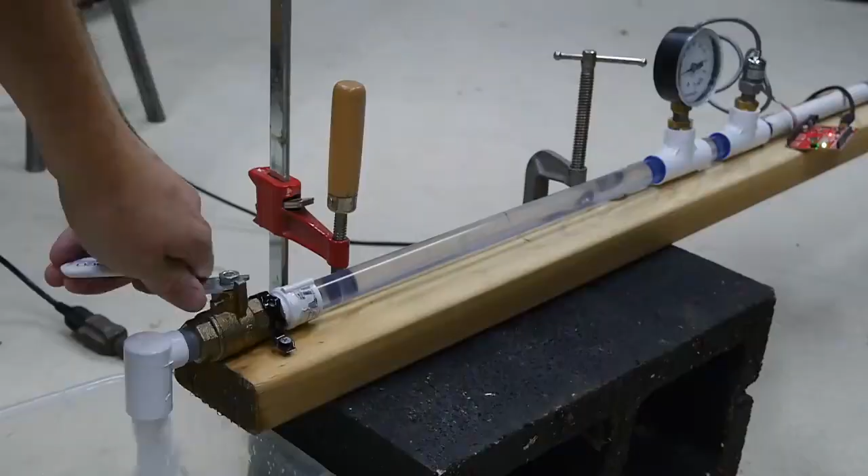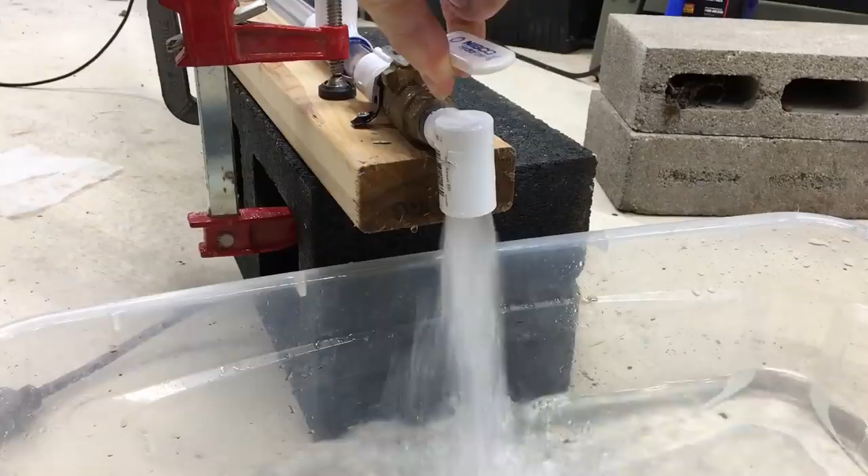It's easy to forget how heavy water is since we hardly ever carry more than a few ounces at a time. But if you add up all the water in the pipelines of your city, or even just the pipes in your house, it makes up quite a bit of mass. And when all that water is moving through a pipe, it has quite a bit of momentum. If you suddenly stop that movement, for example by quickly closing a valve, all that momentum has nowhere to go.

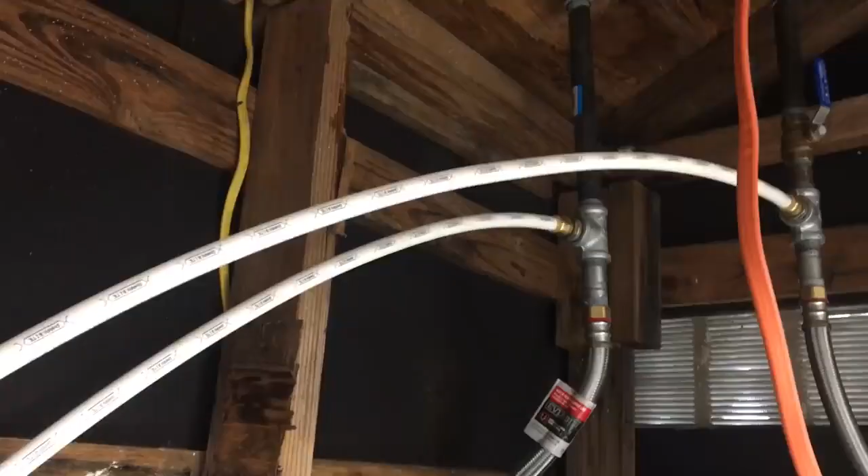Since water isn't compressible or springy, it can't soften the blow. You might as well be slamming concrete into the back of the valve and the walls of your pipe. Instead of being absorbed, that sudden change in momentum creates a spike in pressure that travels as a shockwave through the pipe. Sometimes you'll even hear this shockwave as banging in your walls when you close a faucet or run the washing machine, hence the superhero-esque nickname, water hammer.

Banging pipes inside your walls can sound a bit spooky, but for large diameter pipelines that can be hundreds of kilometers long, that surge in pressure from a change in momentum can cause major damage. Let's do a quick calculation. If you have a pipeline carrying water that is 1 meter in diameter and runs for 100 kilometers, a fairly average sized pipeline, the mass of water in the pipe is about 80 million kilograms. That's a lot of kilograms. In fact, it's the equivalent of about 10 freight trains.

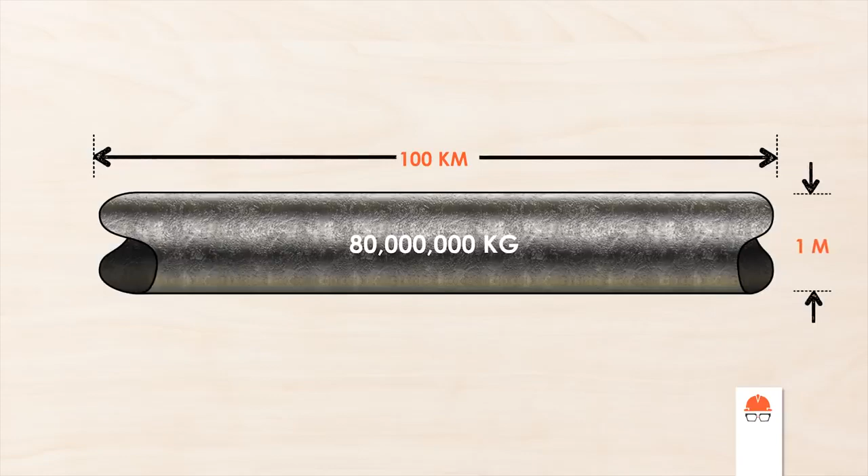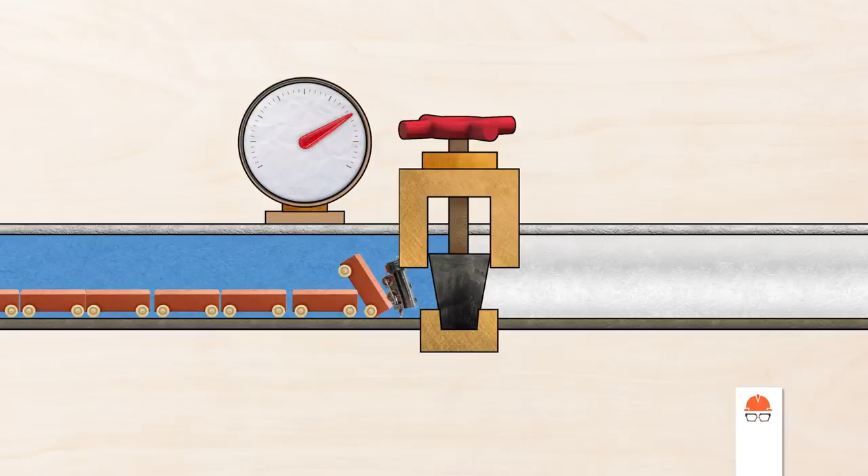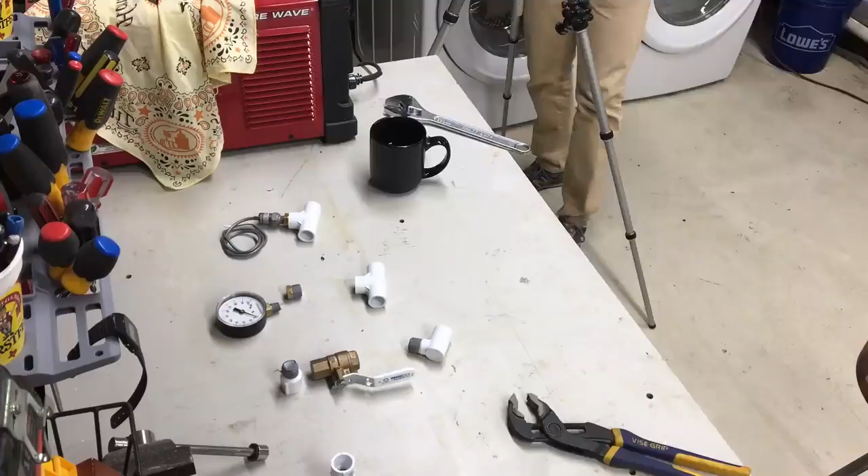Imagine you're an operator at the end of this pipeline in charge of closing a valve. If you close it quickly, you've essentially slammed those trains into a brick wall, and the pressure spike that results from such a sudden change in momentum can rupture the pipe or cause serious damage to other parts of the system. There's actually another term for when a large spike in pressure ruptures a sealed container, a bomb. And water hammer can be equally as dangerous. So how do engineers design pipe systems to avoid this condition? Let's build a model pipeline and find out.

Here's my setup. I've got about 100 feet or 30 meters of PVC pipe connected to the water on one end and a valve on the other. I also have an analog and digital gauge so we can see how the pressure changes, and a clear section of pipe in case anything exciting happens in there. I mean civil engineering exciting, not like actual exciting.

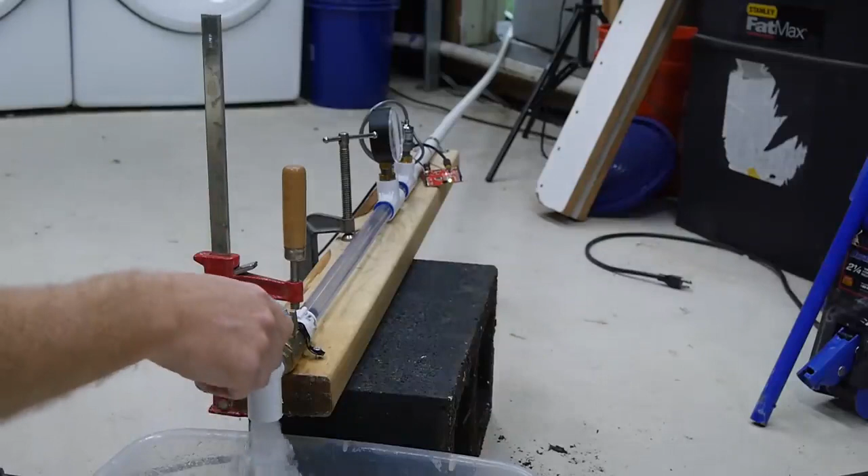Watch what happens when I close this valve. It doesn't look like much from the outside, but look at the data from the pressure gauge. The pressure spikes to over 2,000 kilopascals, or about 300 psi. That's 5 times the static water pressure. It's not enough to break the pipe, but way more than enough to break this pressure gauge.

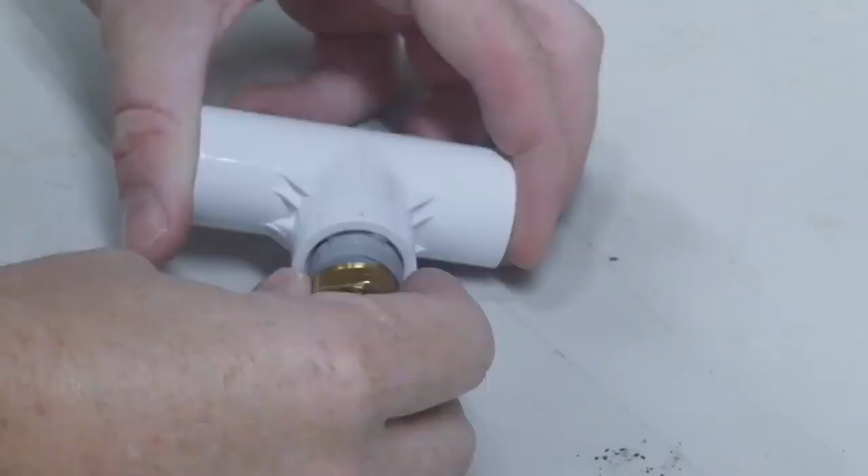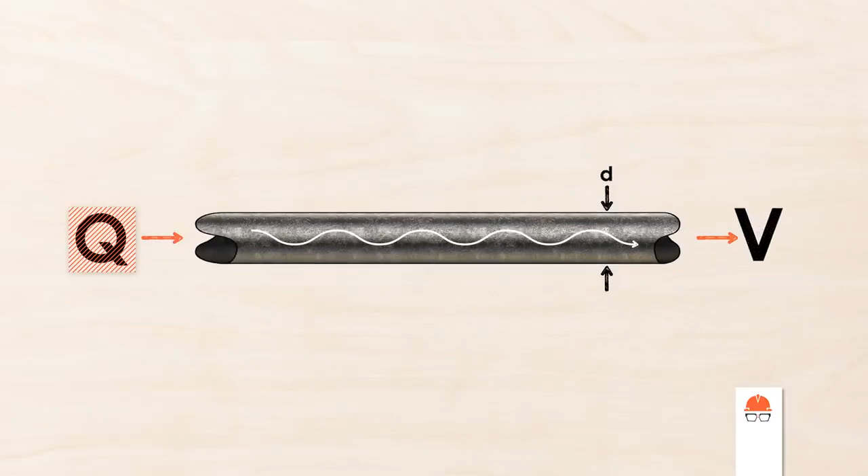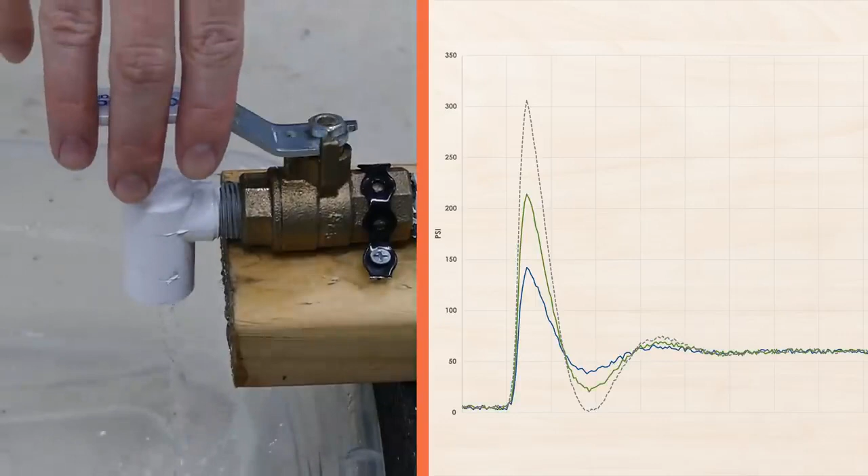Velocity is a function of the flow rate and the size of the pipe. If you're designing a pipeline, the flow rate might be fixed so you can increase the size of your pipe to reduce the velocity. A smaller pipe may be less expensive, but the flow velocity will be higher, which may cause issues with water hammer. In this case, my pipe size is fixed, but I can reduce the flow rate to limit the velocity. Each time I reduce the velocity and close the valve, the resulting spike in pressure decreases.

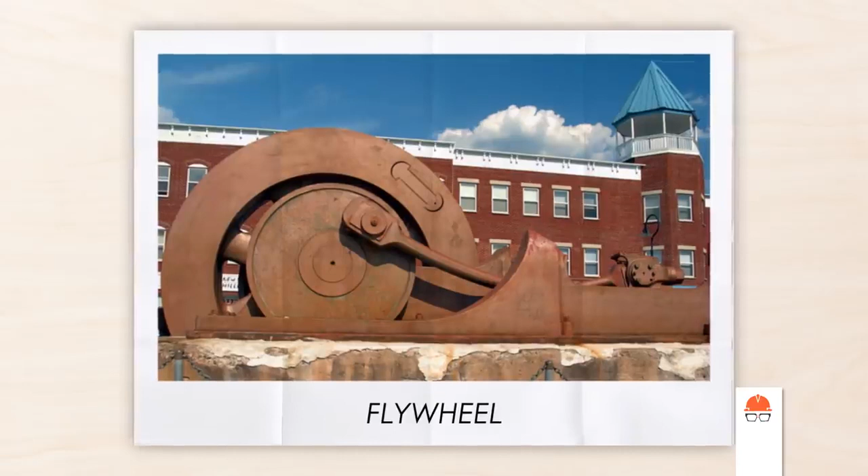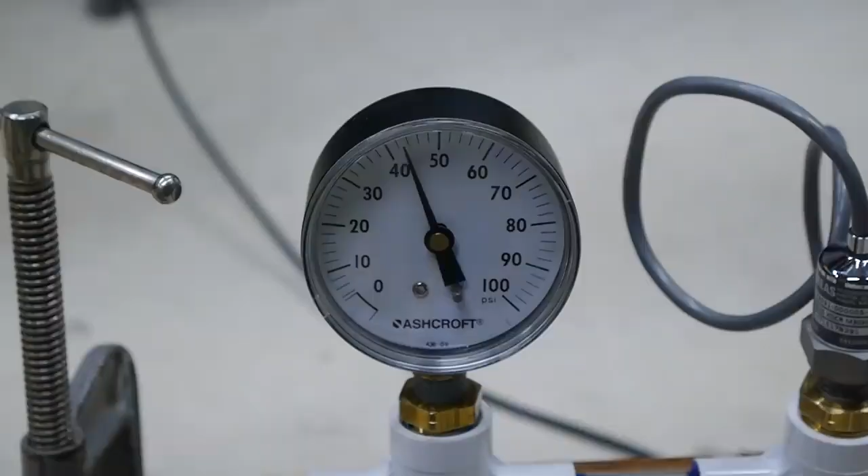Next, you can increase the time over which the change in momentum occurs. One common example of this is adding flywheels to pumps so they spin down more slowly rather than stopping suddenly. Another example is just to close valves more slowly. If I gently shut the valve rather than allowing it to snap shut, the pressure changes are more subtle.

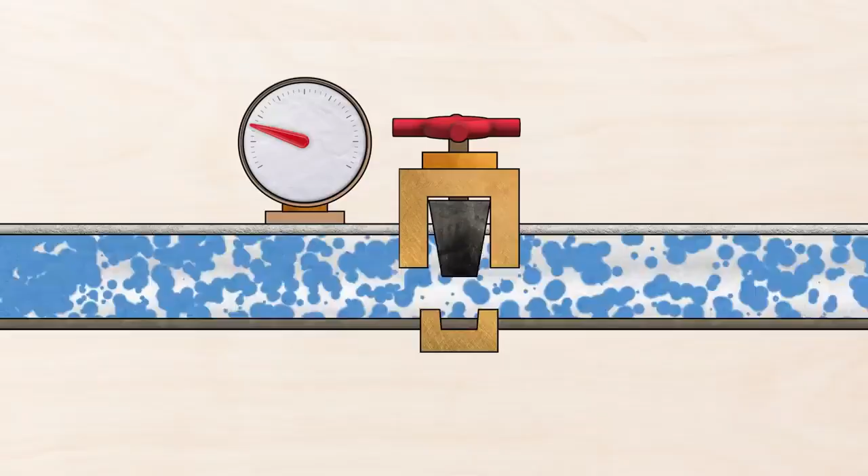On large pipelines, engineers not only design the components, but develop the requirements for operation of the equipment. This will almost always include rules for how quickly valves can be opened or closed to avoid issues with water hammer.

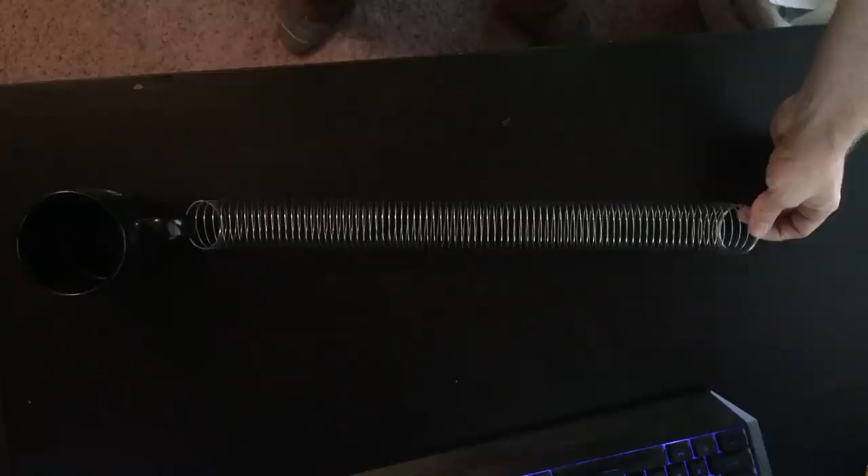The final parameter we can adjust is the speed of sound through the fluid, also known as wave celerity. This describes how quickly a pressure wave can propagate through the pipe. The wave celerity is an indirect measure of the elasticity of the system, and it can depend on compressibility of the fluid, the material of the pipe, and whether or not it's buried in the ground. In a very rigid system, pressure waves can reflect easily without much attenuation.

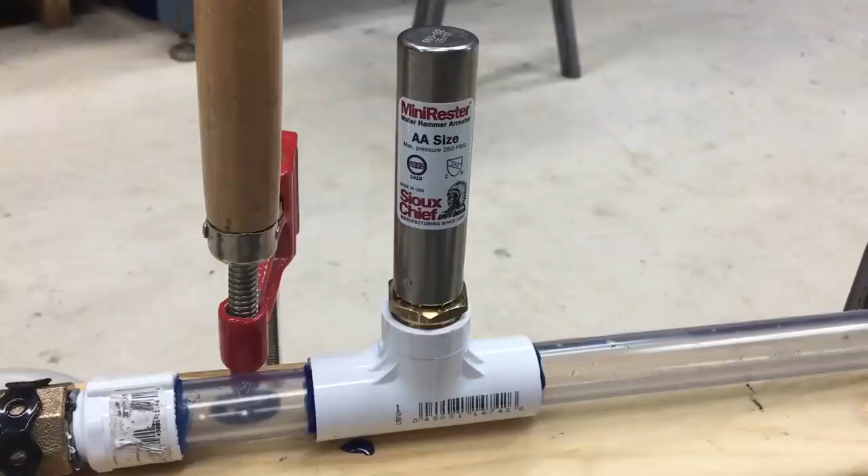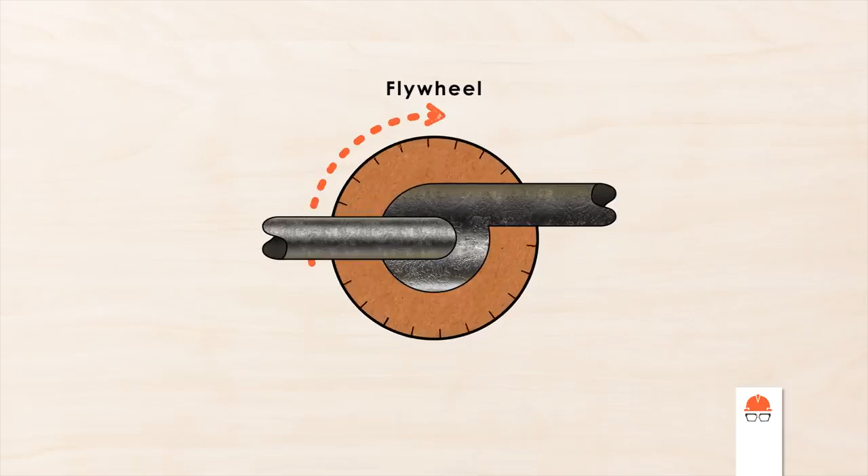I've got flexible PVC pipe sitting on the ground free to move, which is already helping reduce the magnitude of the water hammer. I can increase the flexibility even more by adding an anti-surge device. This has an air bladder that can absorb some of the shock and reduce the pressure spike even further. Anti-surge devices are very common in pipe systems, and they can be as simple as spring-loaded valves that open up if the pressure gets too high.

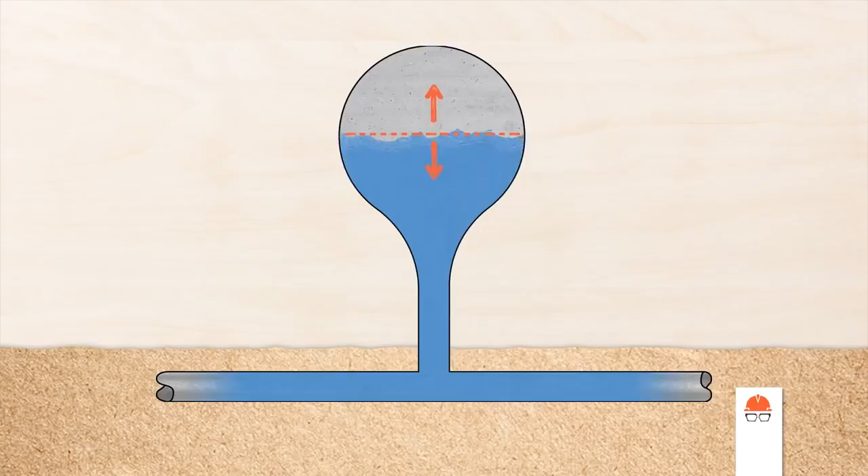In water distribution systems for urban areas, water towers help with surge control by allowing the free surface to move up and down, absorbing sudden changes in pressure. Plumbing is one of the under-acknowledged innovations that has made our modern society possible. But when you harness the power of water by putting it in pipes, it's easy to forget about that power altogether. Water can be as hard as concrete when confined, and if you bang two hard things together, eventually something's gonna break. If you're an engineer, your job is to make sure it's not the expensive infrastructure you designed.

Part of that means being able to predict surges in pressure due to water hammer, and design systems that can mitigate any potential damage that might result.